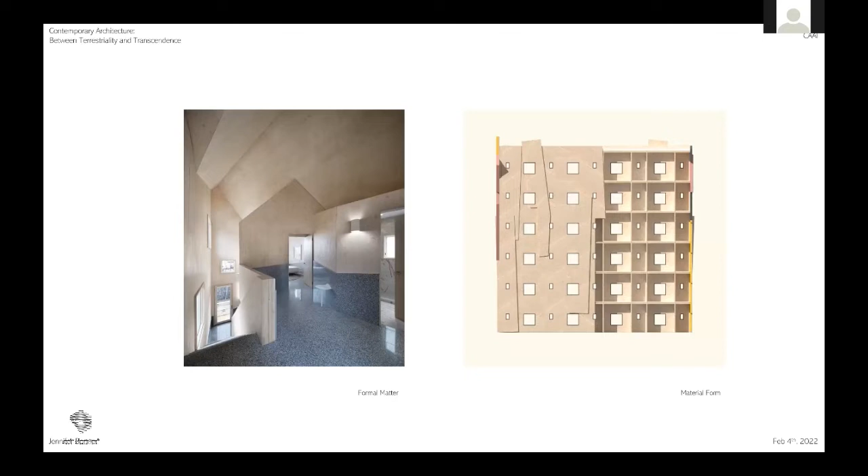Going back to our diagram of form and materiality, perhaps we could locate the project called House Gables on the top left corner, where she starts with an idealized composition of gable roofs, later made with CLT.

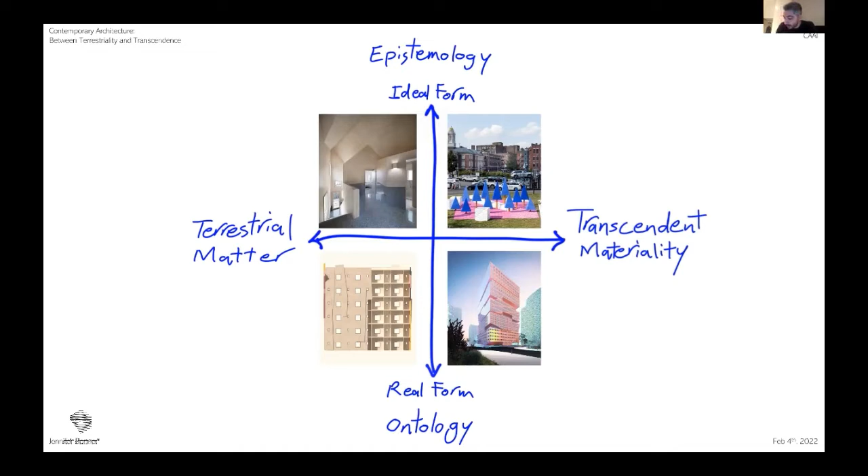So although we could see Jennifer's project touching all these areas, maybe we can observe a general inclination in her practice towards idealized form and transcendent materiality, which sometimes she calls an off-the-shelf approach in design. I stop here and invite you all to join me to welcome Jennifer.

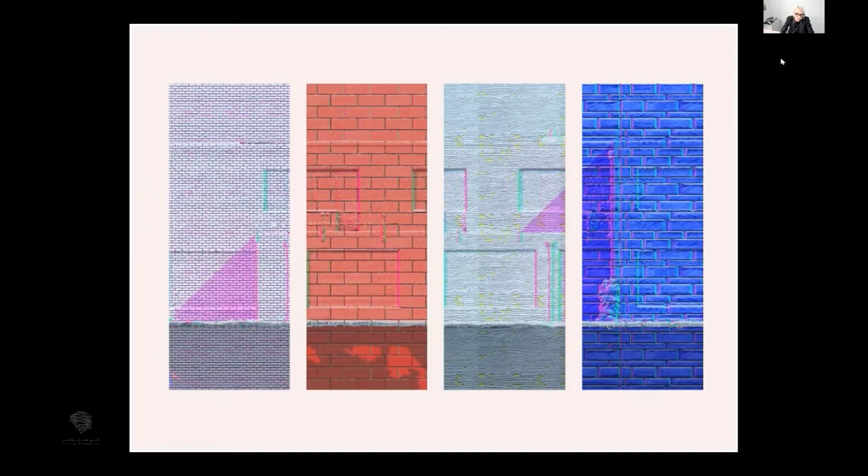And the result are these different kinds of elevational studies that are directly applied onto the mesh of House Longa and House Esther. And so we see that we're artificially... yes, please go on... just that there's a range of scales and misinterpretations and materials that we couldn't imagine would be possible embedded together in the same image.

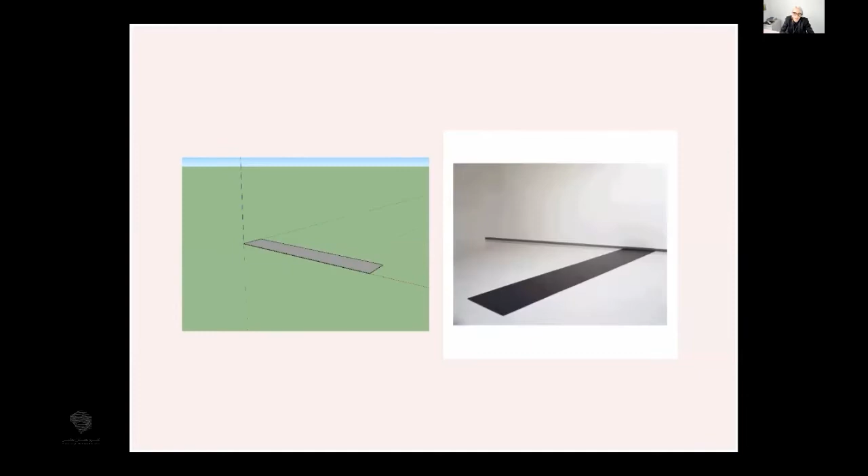These are the two sets of objects I'm working with. On the right, a catalog of minimalist art sculptures generally put in galleries, like Carl Andre and Peter Alexander. But we searched for these minimal art sculptures in SketchUp 3D Warehouse, which is the GIF on the left side. So we're kind of taking and borrowing these digital artworks.

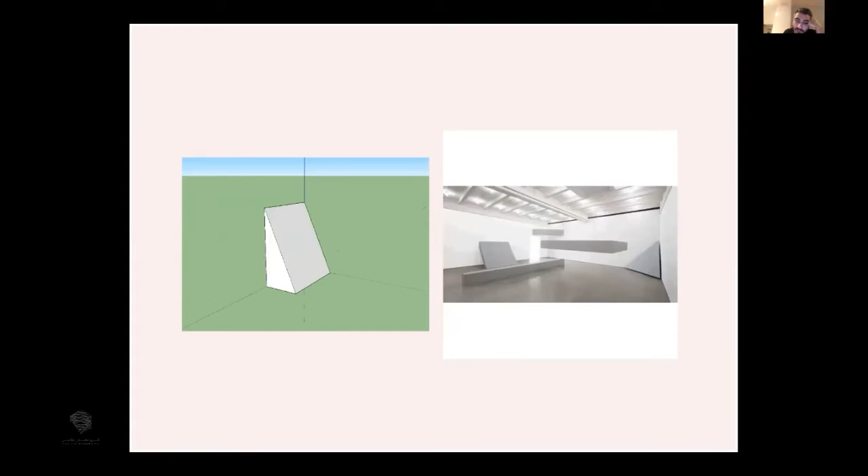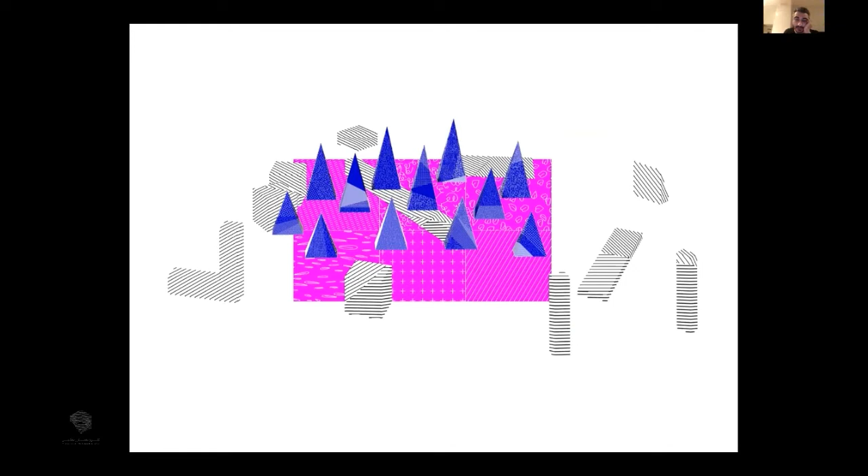Another thing that's important to the white minimalist sculptures is that I'm using vinyl siding, which is a very ordinary material in the New England area, but I'm misusing it by hanging it at angles that are traditionally not used. So this became a real process of unfolding, unrolling, and drawing through the various ways we wanted to apply the material to create this effect.

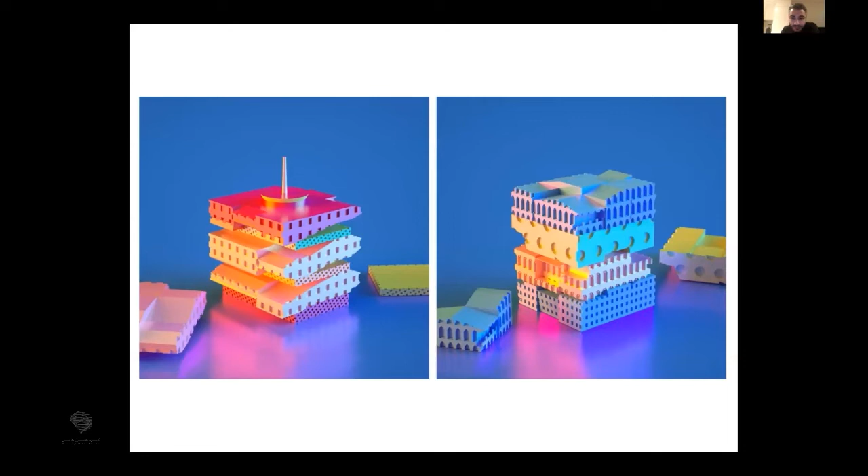So it's important to me that these conceptual models and digital models look eerily familiar, that they do look like a sub sandwich or a burger.

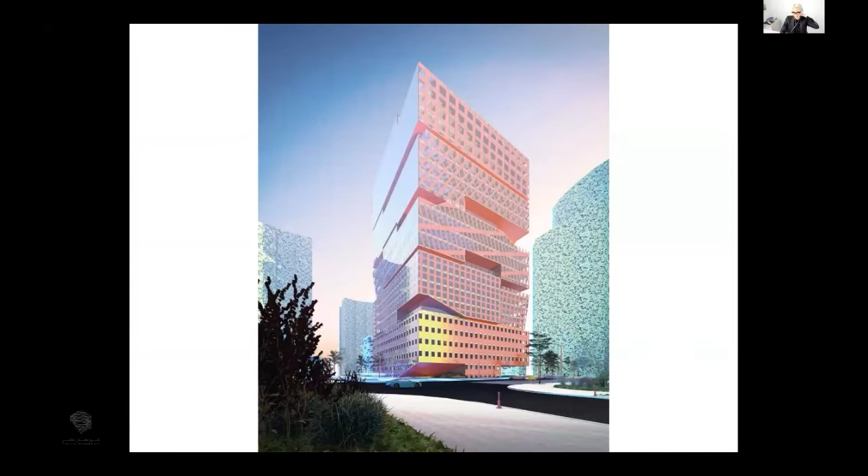But again, the ambition is not to stay in the abstract and inside the gallery, but to also turn the project into real architecture with real facades and plans, and a massing that could be a developer's pitch for a new mid-rise office tower.

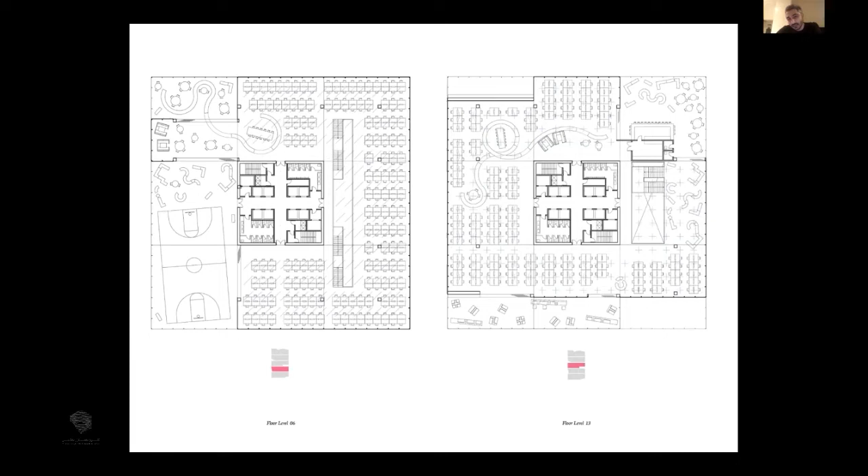And what this does is it affords this technique that we could have maybe open corners, or we could have terraces that are just adjoining the office plan.

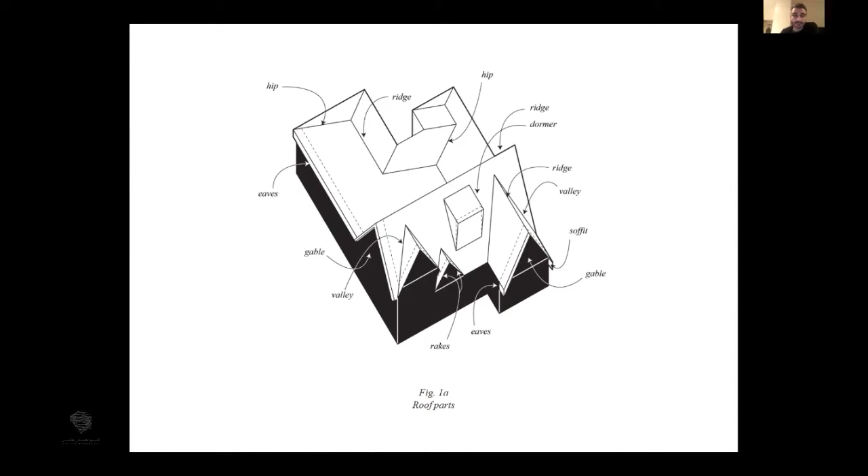In the American context, these ordinary houses are built with sticks of lumber, so 2x6s, 2x8s, 2x4s. And I would kind of say that this is potentially like, in the American context, could we call this the contemporary cathedral?

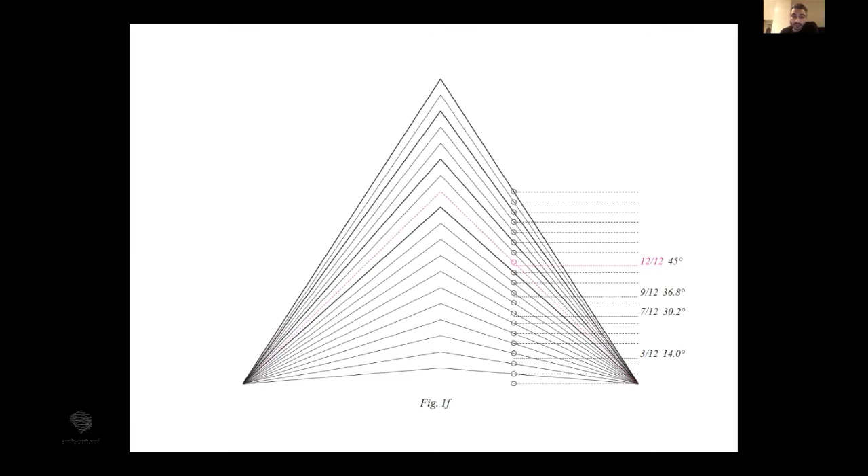Again, here's the catalog of these kind of ordinary forms.

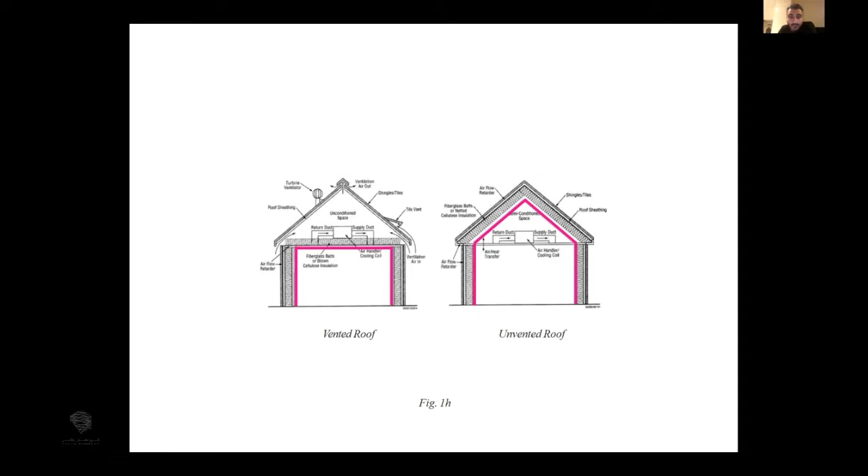So again, these are all the materials that I am wrestling with and thinking about as I develop the next body of work.

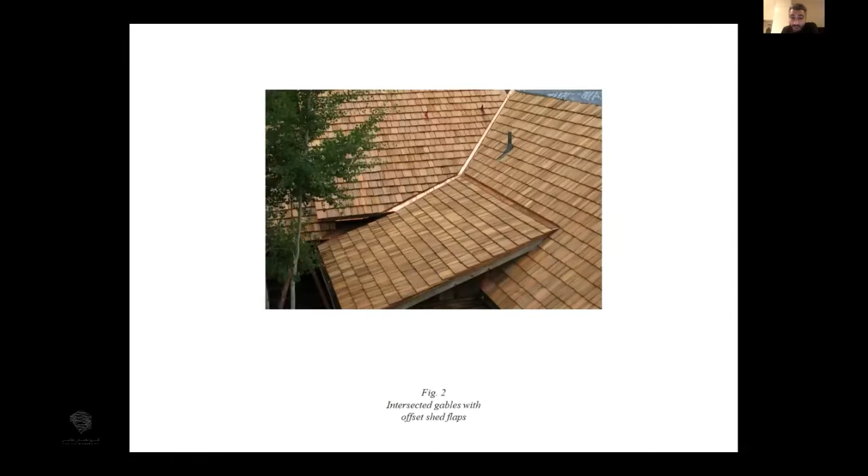So this obviously gets taken into the digital space. I wanted to point out the variety of roofs. In the more affluent neighborhoods, something like Buckhead, there might be 7 different roof types that cover the floor plan of these large villas. But if we look at the more humble neighborhoods in Cabbagetown, it might be just a shotgun house with a very simple gable or hip roof.

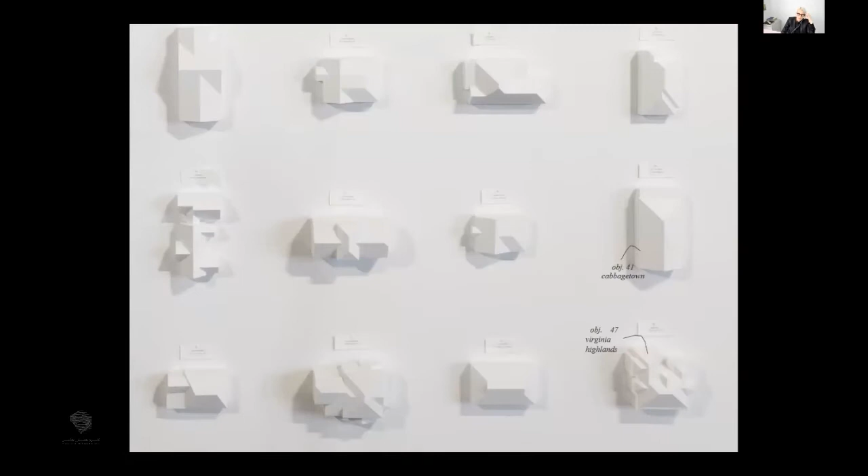And so this is the result of that design work. We made 16 large-scale massing models out of EPS white foam. Massing models are usually small studies that sit on our desks or in the conference room that we present to clients. In this case, I've taken the small massing model and scaled it up to this larger scale, but I have not brought any detail along with it. So in these 16 models, we're just purely looking at the geometry, the form, and the focus on the roofs.

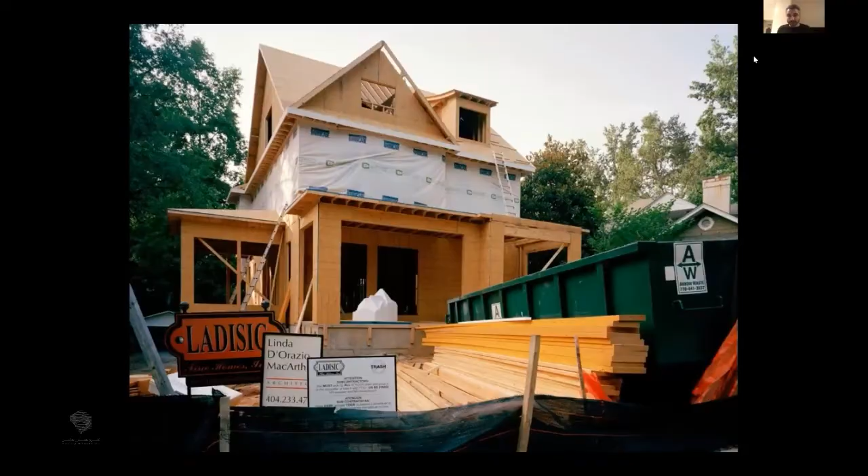So this one gets really exciting because we see the construction of the wood-framed house with the plywood, which in a way, if you squint your eyes, is a massing model itself, with the massing model sitting on the front porch.

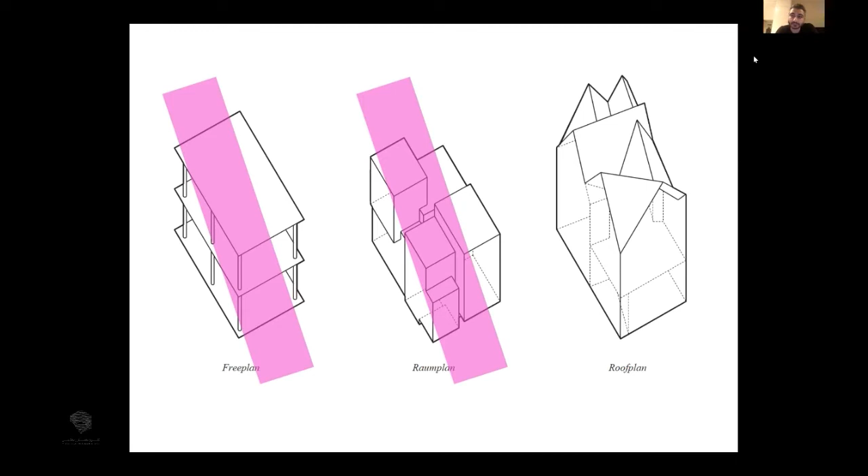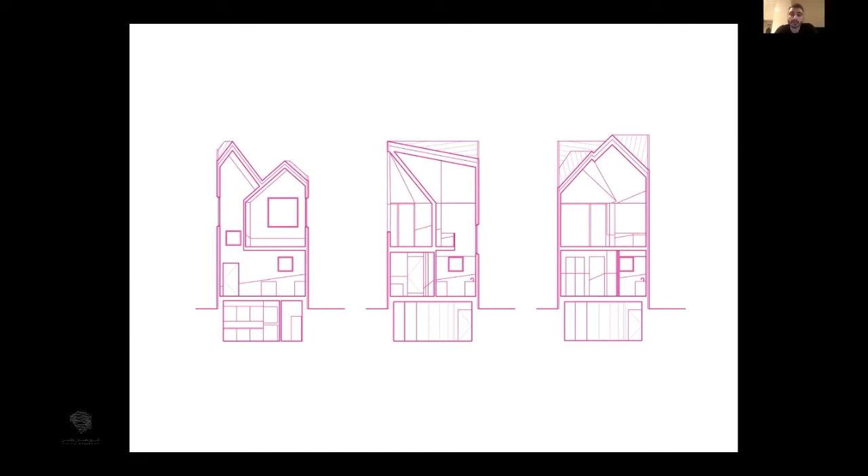Again, the dollhouse, and the introduction of another conceptual overlay, which has to do with what I call faux finishes. In the American South, there's a tradition of not being able to afford precious marble or materials, and a desire to upgrade one's home by doing it yourself, using an applique technique one might call faux finishing.

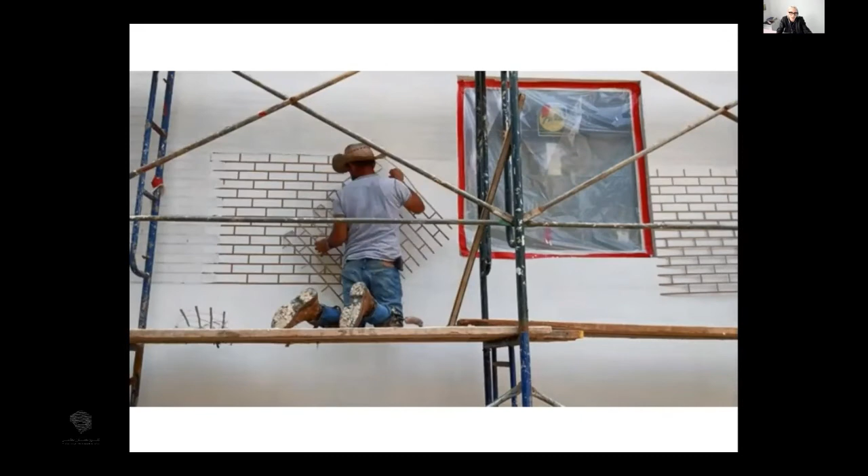So this is actually a product that's being applied in the field, which is a kind of brick template. It's a sticker. They apply it after they apply 2 coats of stucco. The sticker goes on, they trowel on the last 1/8 inch layer of stucco, and then they peel the sticker off. So it creates a very shallow relief. But what Arby's does not have that this Haus Gables has is the kind of glittery glow that is blown onto the building in the very final step.

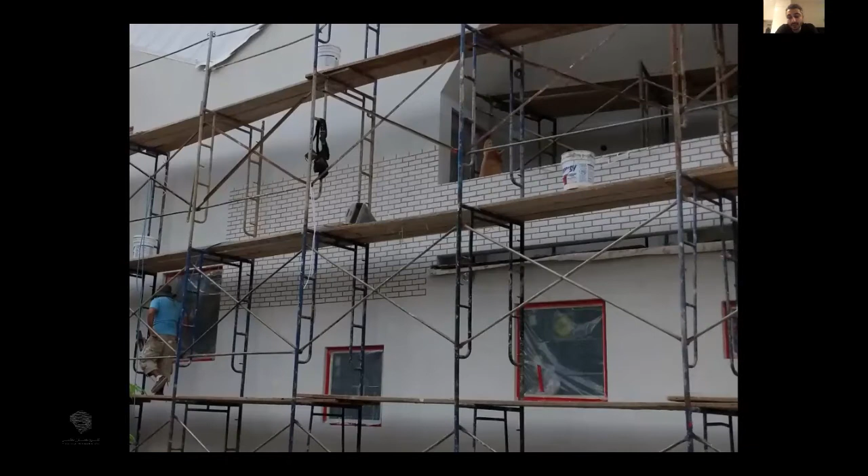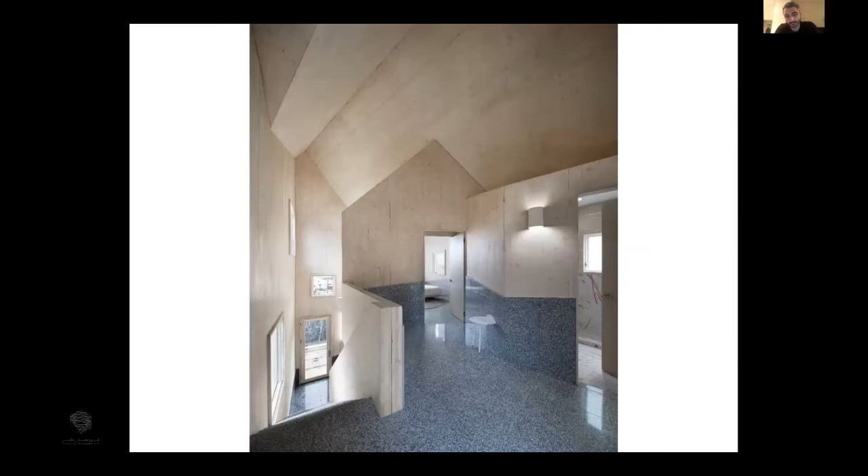So this is one of my favorite views of the house, on the 2nd level, looking at that roof room. Here we see the effects of both the kind of fake materials or faux finishes in combination with this highly engineered cross-laminated timber that's doing a lot of structural work. The cross-laminated timber panels become a superstructure, and the smaller bedroom can be hung from the underneath side. So the CLT is acting as a folded plate, and the faux finishes act as a wainscoting, a way of breaking up the CLT as the final surface.

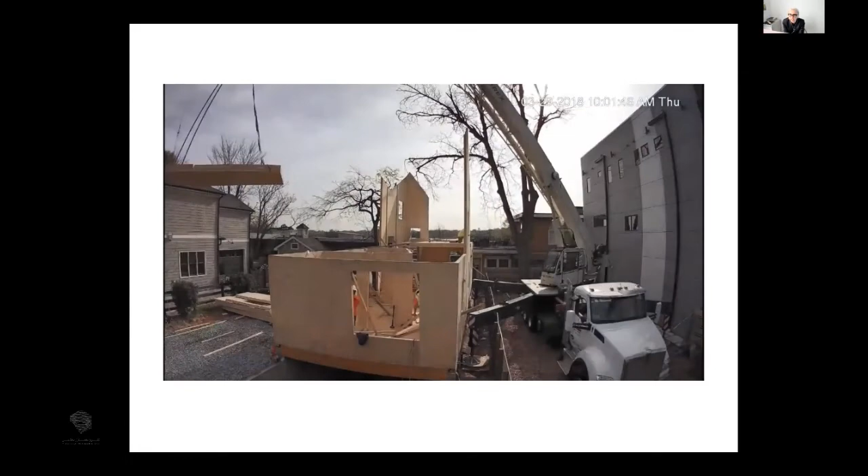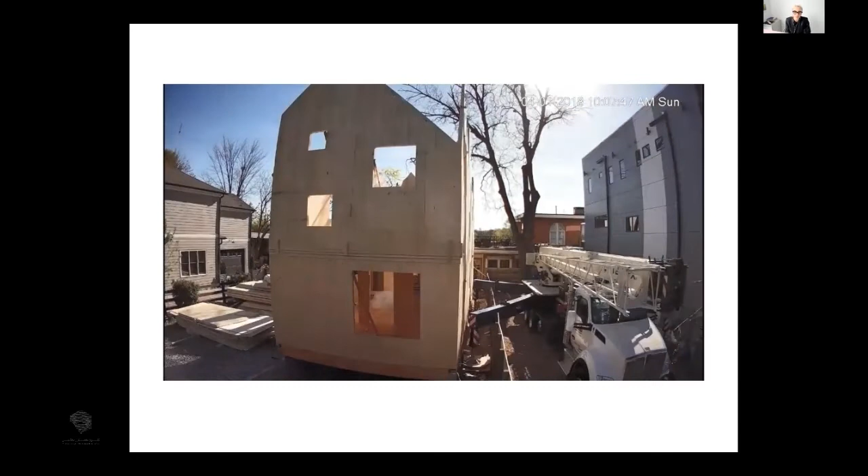Okay, sorry. Okay, so here is all the technical parts. This is the cross-laminated timber. So I'm working with Hanif Kara, a structural engineer in London, who, when we first started looking at how to crash 6 gables together, it became very apparent very quickly that we could not do this with the traditional stick frame construction. Hanif put forward using this kind of newish material, which has been used in Europe for the past 25 years, but is very new to the US industry. These are the cross-laminated timber panels. There are 87 of them. It took 14 days to erect.

Yeah, I could say so much, Aryan. Okay, yeah, I'm trying to summarize the numbers, to memorize them. So,

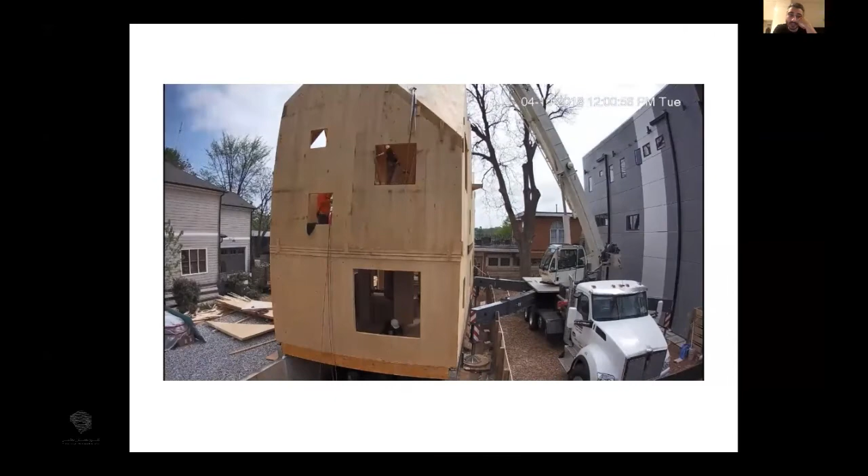So this is after the first day. I believe there's like 8 panels in place, and it kind of seems like maybe half the house is built after a day working with the 40-ton crane.

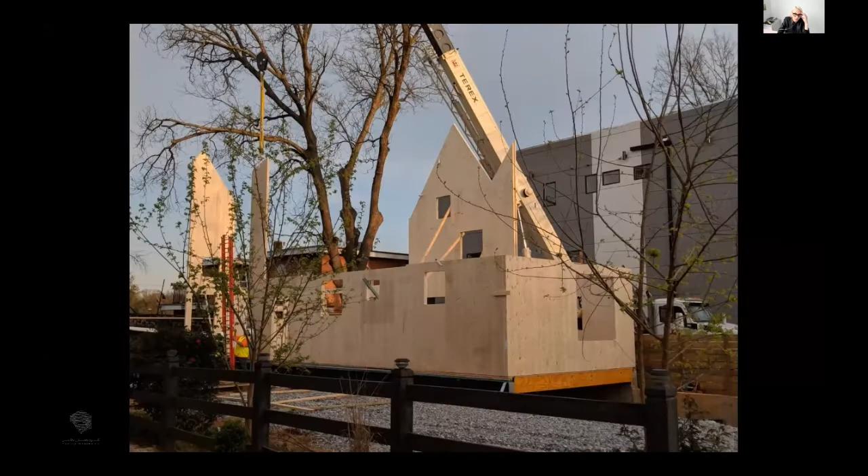Also to note here is that if you kind of squint your eyes, what's super interesting about this materiality is that it resembles model making material like foam core or cardboard that would be found on our desk. So the way that we build architectural models with this material is also the way in which we construct it one-to-one.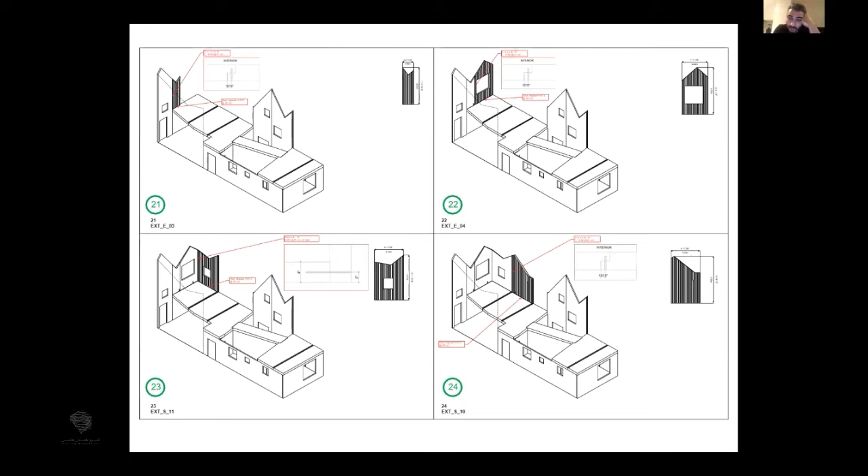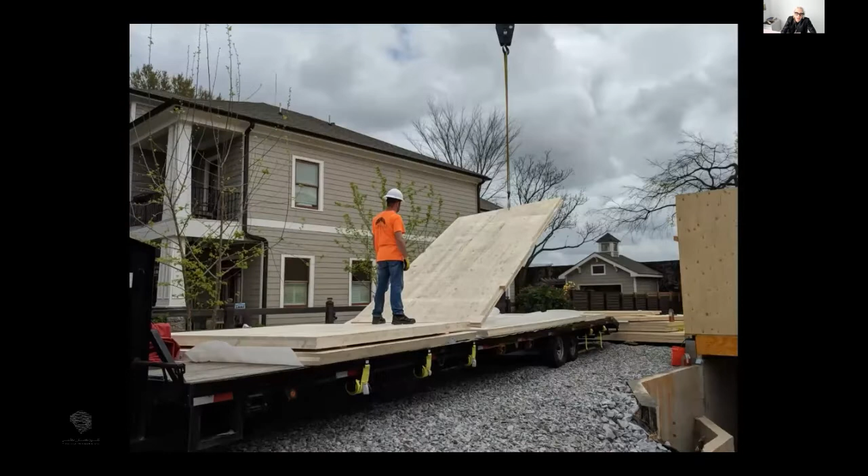So the panels were produced in a factory in Austria by KLH, and Hanif sent engineers from London over to the factory to inspect the product before it was placed into these shipping containers, and then ultimately arriving on site at the port of Savannah and then trucked over on 11 trucks to the Atlanta location.

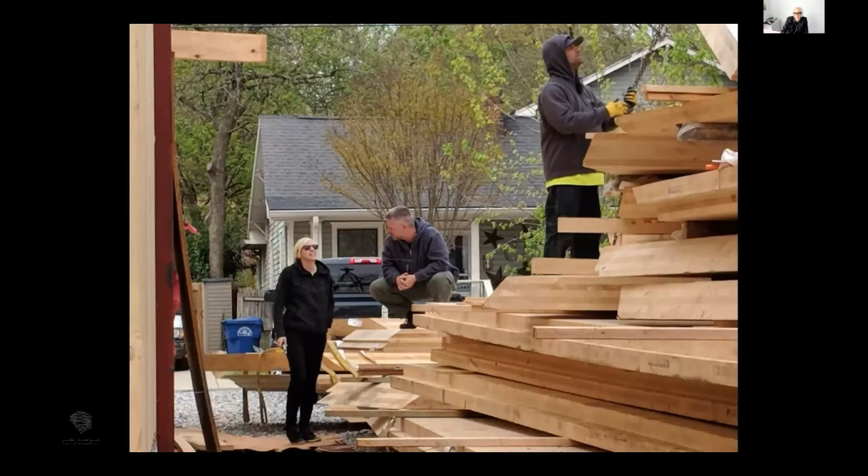So again, 87 panels, they were all flip milled, meaning that we're cutting a geometry on one side of the surface, we're flipping the panel and cutting in another geometry. And that's because of the kind of compound cuts and angles in order to make the ultimate geometry.

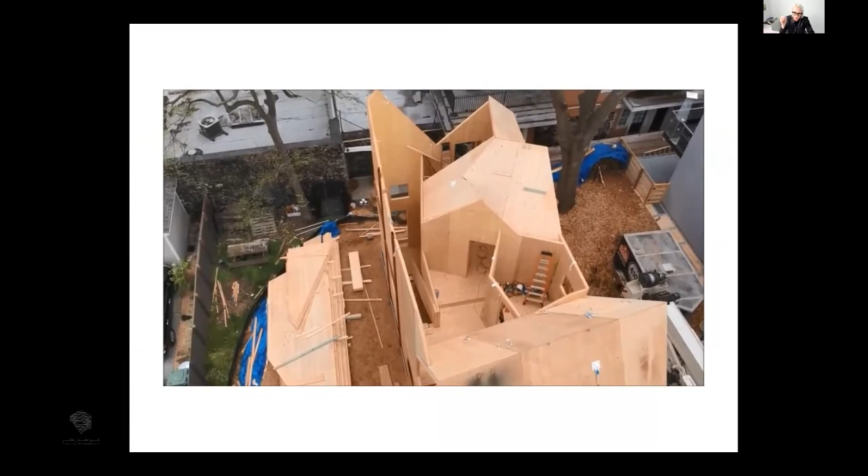The exterior walls are made of 3-ply, so 3 layers of the timber laminated and glued together. The roof panels are 5-ply, so 5 layers, and the floor panels are 7-ply.

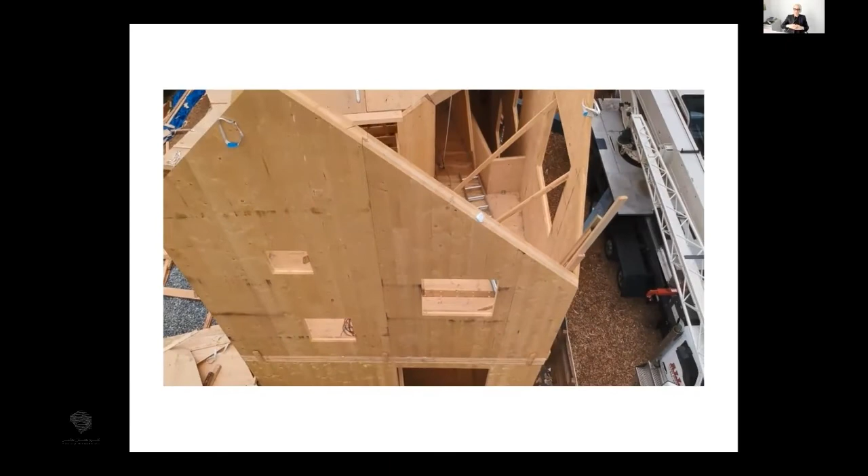Yeah, so there were 4 engineers that ended up working on this project. This was at the time the like 3rd or 4th house within the US constructed with this material and with this technique.

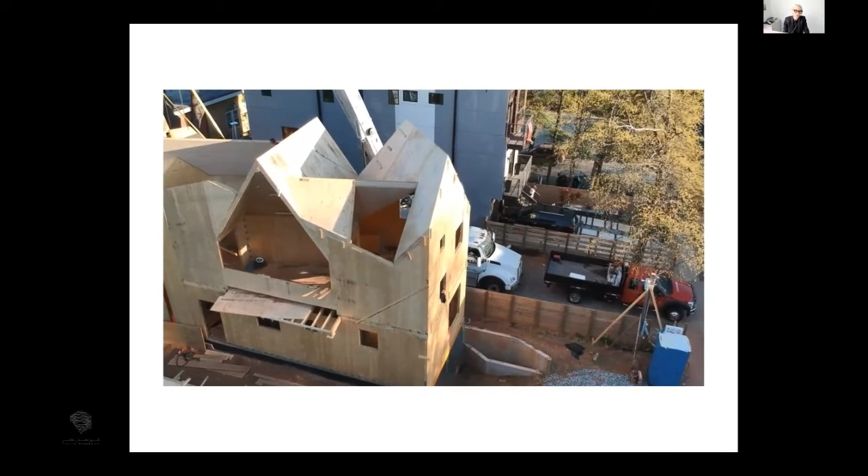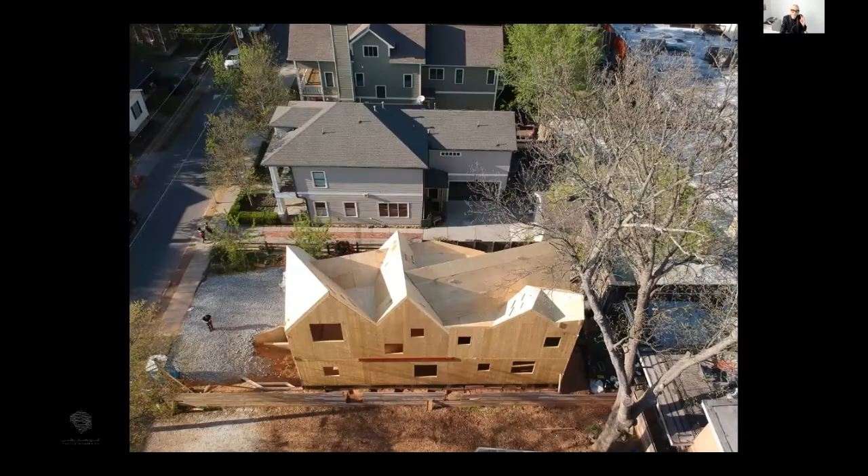So this was a very exciting day for my office, as this was the first project I'd ever built. And so to go from like the white foam model in the gallery to kind of building the one-to-one massing model on site was like a, you know, pretty exciting moment.

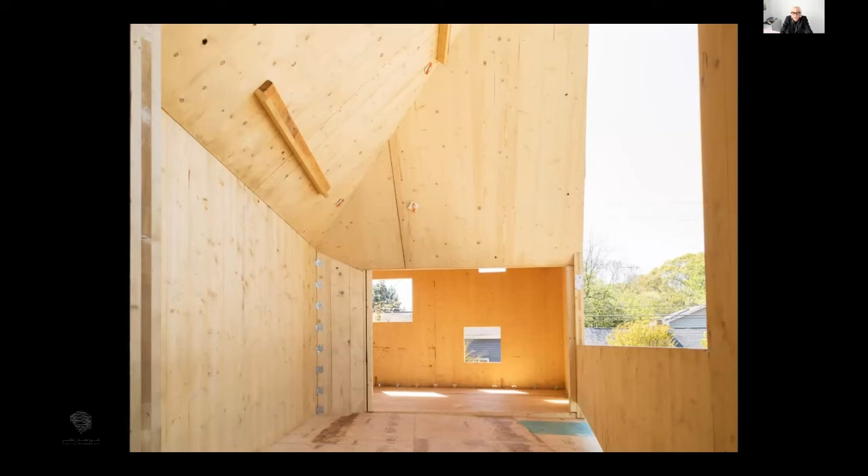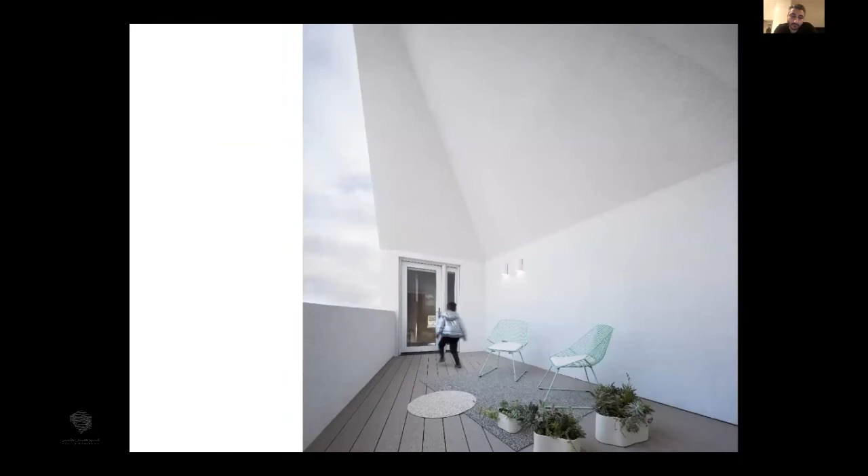So there's obviously the exterior of the house is white, trying to be kind of the original massing model. There's two sets of spaces that are also kind of very white, which is this kind of patio terrace on the upper level. And then also the garage that's kind of at the base of the house is finished in this kind of white, reflective, glossy materiality. So it's trying really hard not to be a garage and more like a gallery.

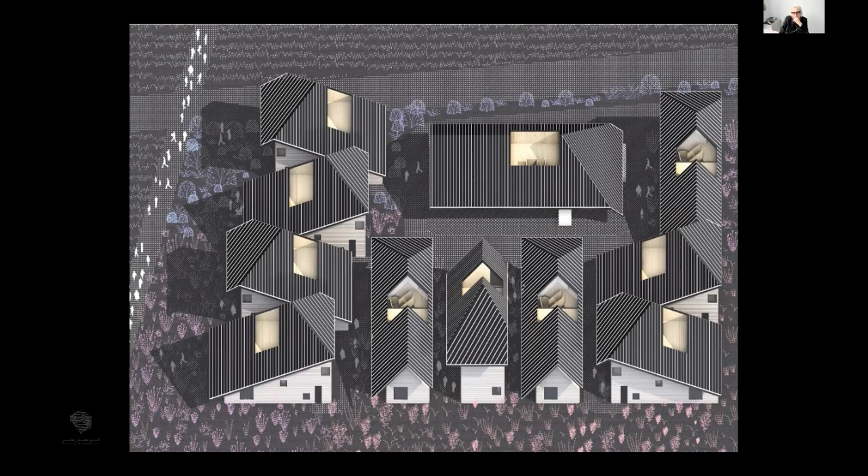And here the materiality is trying to be quite cartoonish. So this is a standard metal roof system, but instead of using kind of small battens, I've selected a really wide batten. So I'm trying to make the roof look like a drawing or a cartoon, and the same ideas applied to maybe how the landscape would be imagined or how the cladding system would be imagined for the exterior.

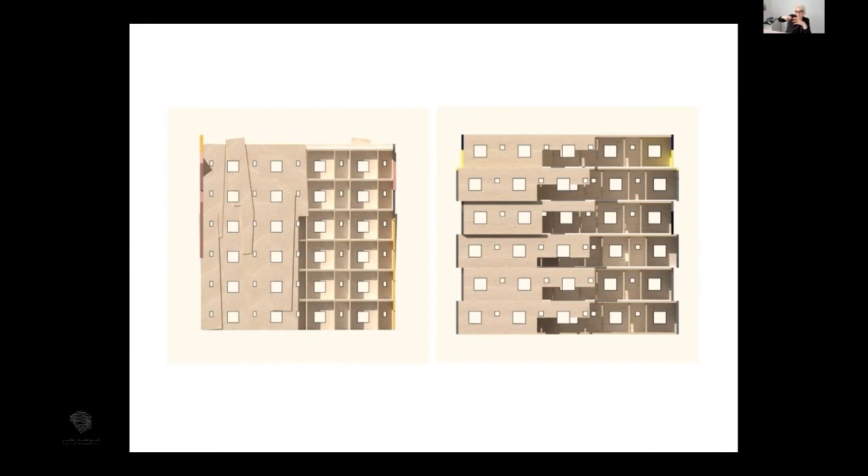So if you have a 50-foot block and we put 4 together, we then have a 200-foot block, housing block, which is an interesting scale.

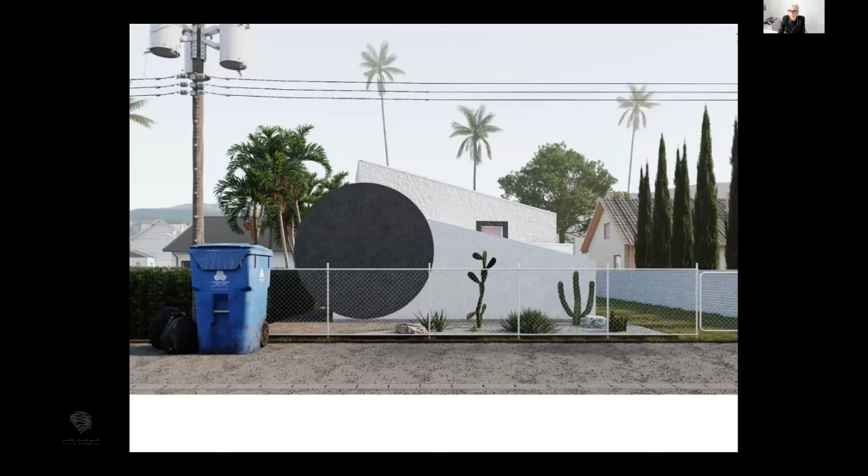And so these are a set of models and also their materiality, which is taken directly from the context of Los Angeles. Most houses in LA are made of traditional framing with a stucco finish. We're interested here in all the textures we can create with stucco, while also reading a very particular point in architectural history, which is where the typical Los Angeles bungalow in the 1970s started to change its look and form.

People were hiring interior designers to dress up the facades of these original bungalows. Someone like Charles Jencks, the theorist, came through and looked at this phenomenon in the 70s and termed this technique a false front.

Sorry, Arjen. No, it's good.

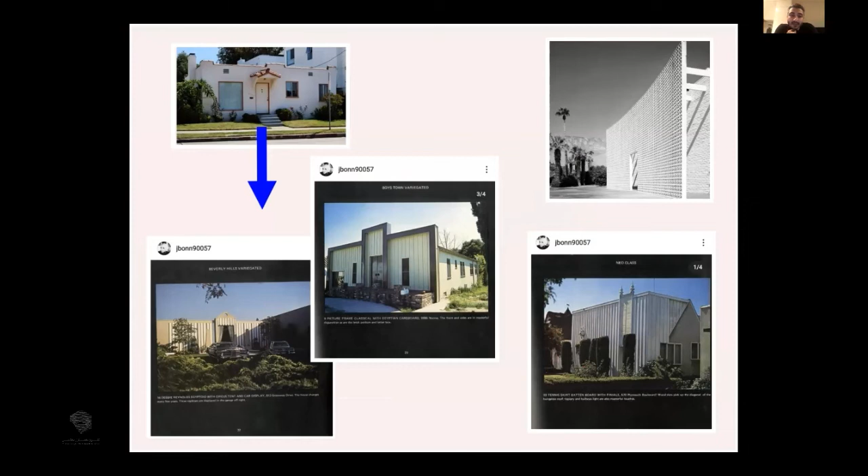Again, interested in art practice and the work of John Baldessari, where he's using a reduction of very primitive shapes and figures on top of

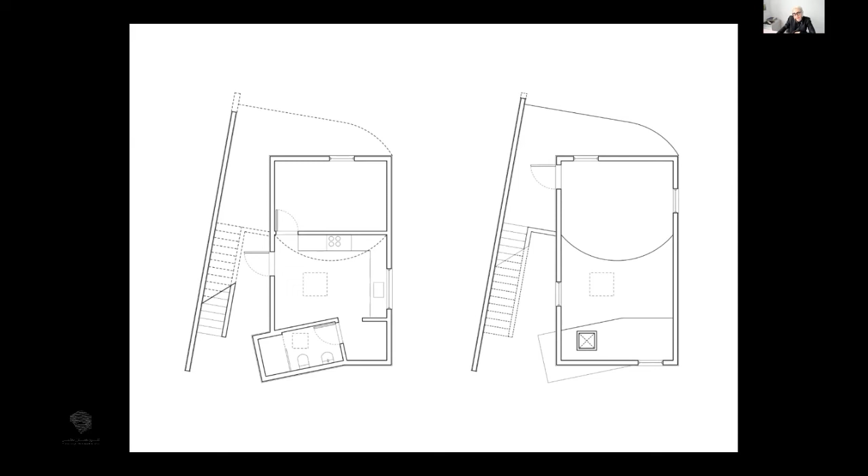And this one, this is a one bedroom with a mezzanine.

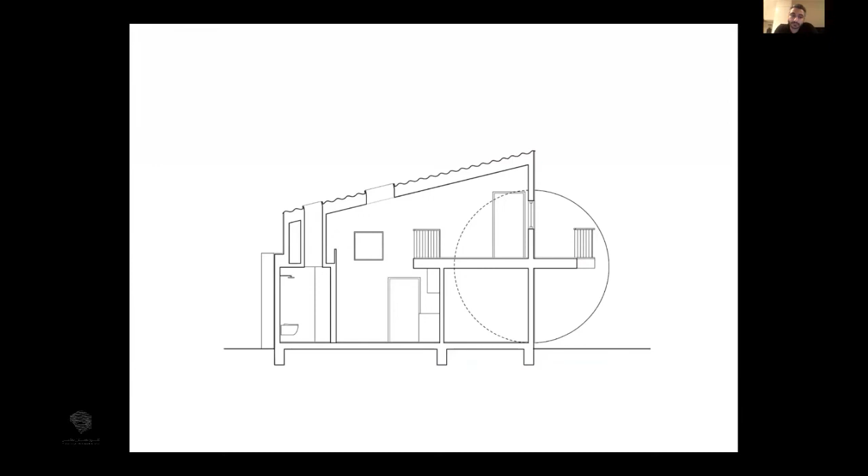So, yeah, we're definitely using materials as large scale graphics that get applied and then start to both inform the form or the shape of the roof, and also the technique for making these false fronts.

And I think this is interesting also functionally, because if you have a tenant in your backyard in Los Angeles, this kind of blankness might be super useful to create a sense of privacy between the tenant and

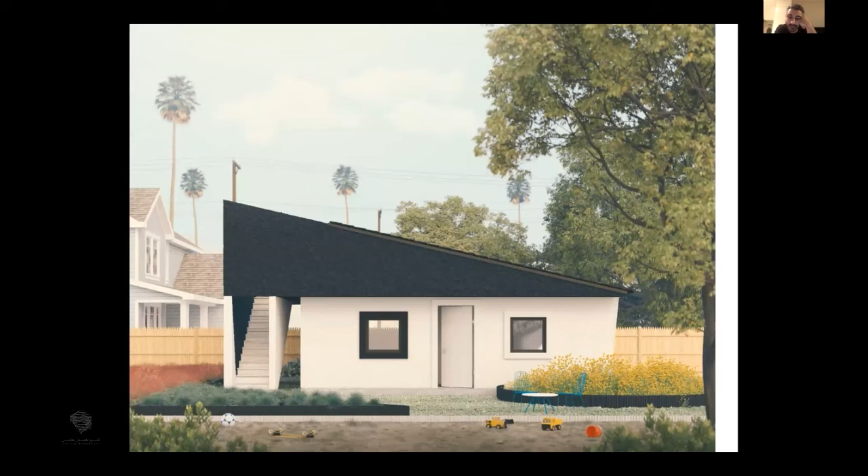So what's interesting, this one's called Lean-to ADU, which also takes a lot of reference from the American do-it-yourself, build a shed in your backyard.

But what's interesting about this section is that the roof, the terrace inserts itself inside the form to set up the kitchen space, but also claims more territory within the roof space for the exterior.

So just to mention that these ADUs are so small, can you even do architecture with them? I mean, they're so tiny, very difficult, you're maxed into a lot of building code and height limitations, and the square footage is small. So my effort here is to try to spin it into architecture in some way.

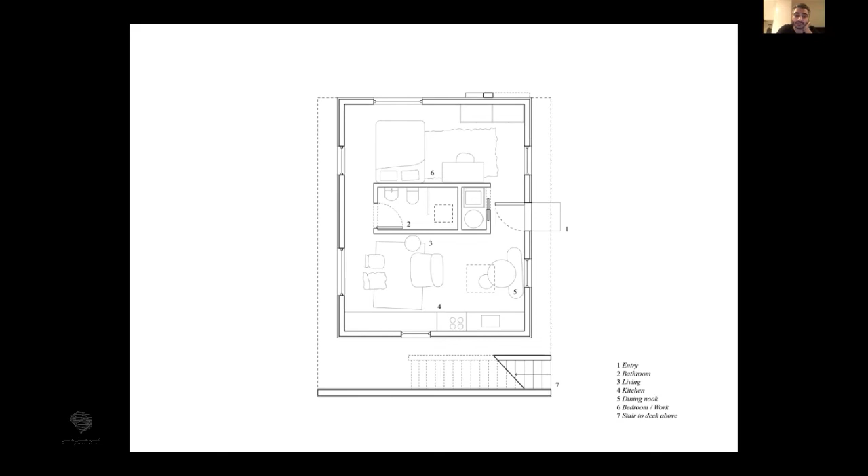And some of this is the view from the terrace, the interior.

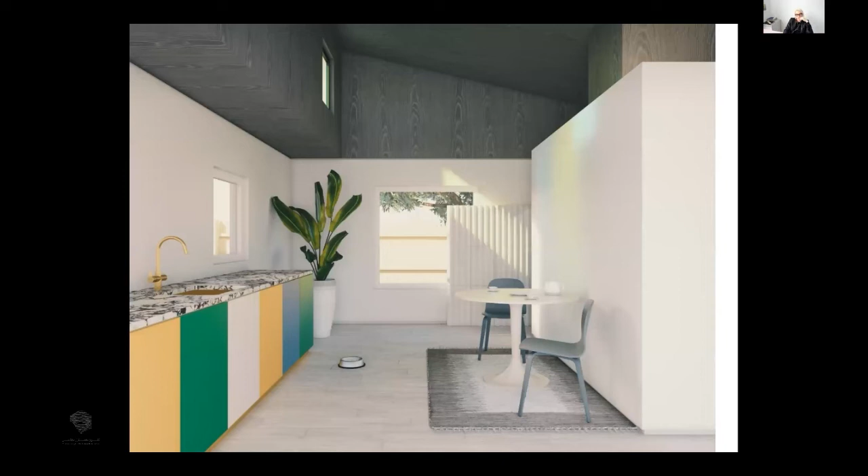And what's interesting to me is always this kind of alley view of the small or the ADU house sitting in the backyard of the kind of larger house. And that's the kind of end of everything.

I don't have a big summary to give, but I think if we could talk through a few questions, there might be a way to kind of summarize some of the work. I did want to say that I hope that after describing my design process in each of these very, very different projects, there's a kind of theme emerging: that the work always starts with a conceptual question or research question or a set of ordinaries that I'm trying to push against. And then the kind of forms and materials and color and all of that looks very different project to project. And that's always on purpose and intentional, to make sure that my architecture is kind of always changing and challenging even itself.

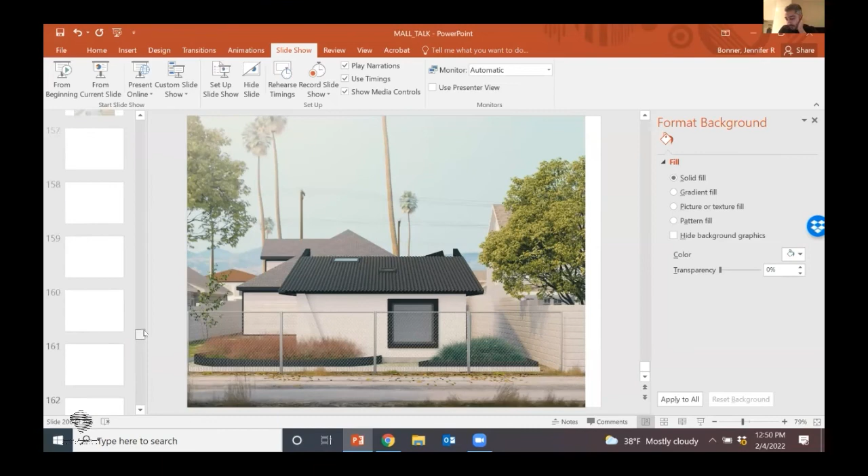Okay, so there are a lot of topics that we can discuss and talk about. But what is very fascinating for me is that if we see materiality as a spectrum that has both ends, using natural or realist material on one side, and on the other side fully artificial, dematerialized entity, almost representation. To me, what's super interesting is that in a way you try to stand in the middle by looking at both. In a way you take the real material and try to hack it using very non-material digital media and transform it.

I think the reason I'm in the middle, Arjen, is because I think we just lived through maybe the 2000s where we were building very fluid forms, and there was a real hype around that technology of building facades and geometry, almost as liquid. And I think it only resonates so much, right? So I think it's important that we are looking at the real, but then we're also, as you said, trying to push it into representation and the artificial in order to progress that original material. And also, being in the middle, I have to get things built, right? So I do need to rely on products and traditions that are kind of known, and then I need to, as you said, hack it, to then pull it into this contemporary frame of mind.

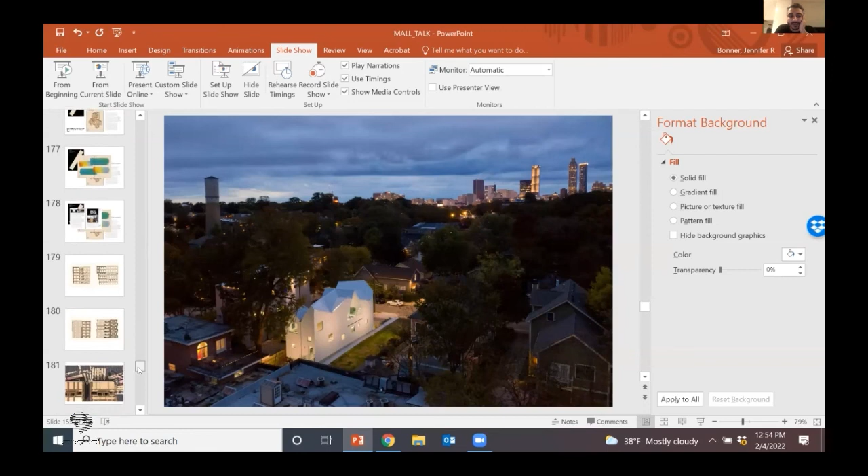Okay, before I open it to the audience, I want to ask you one more question. I think considering your activity on Instagram, and this lecture is being shown on Instagram Live right now, I'm curious to know, what do you think about the influence of Instagram on architecture today? Is it too much? Is it overwhelming architects? Is it too much sensory input that we receive every day? Should we filter it, or is it helpful to get influenced by different stuff? What do you think about this?

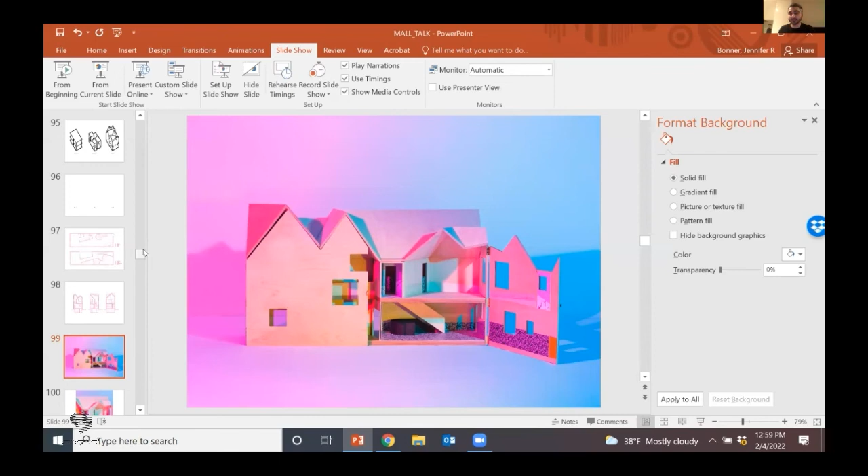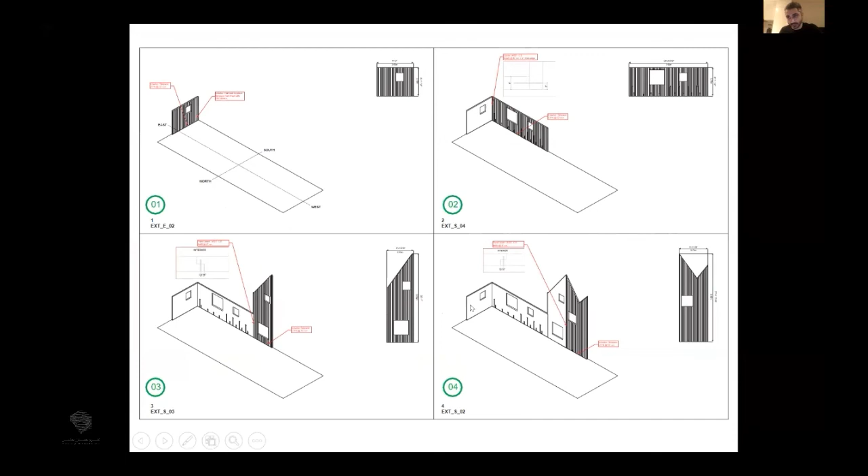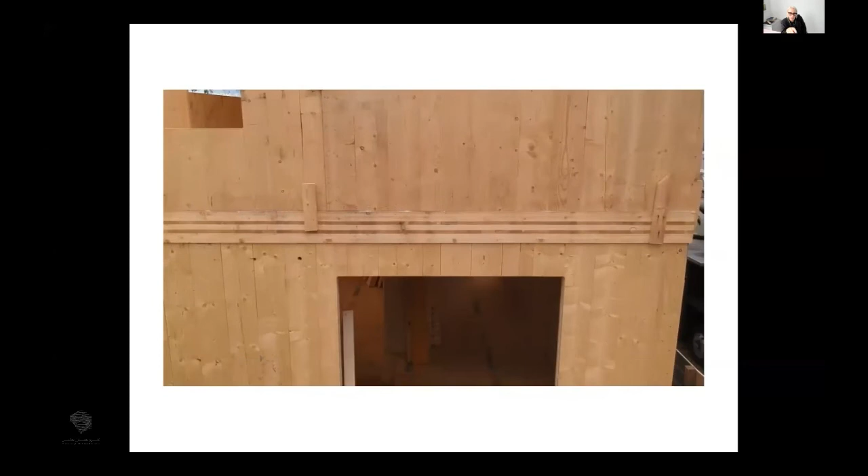Yeah, great question. I got carried away talking about materials and CLT and modules. But yeah, it's really important to think about the mechanical systems for building a house like this, because you can't hide cables or water pipes or HVAC systems. So what we're doing is we're running all the electrical... see that? It's too fast. Hold on. Let me back up.

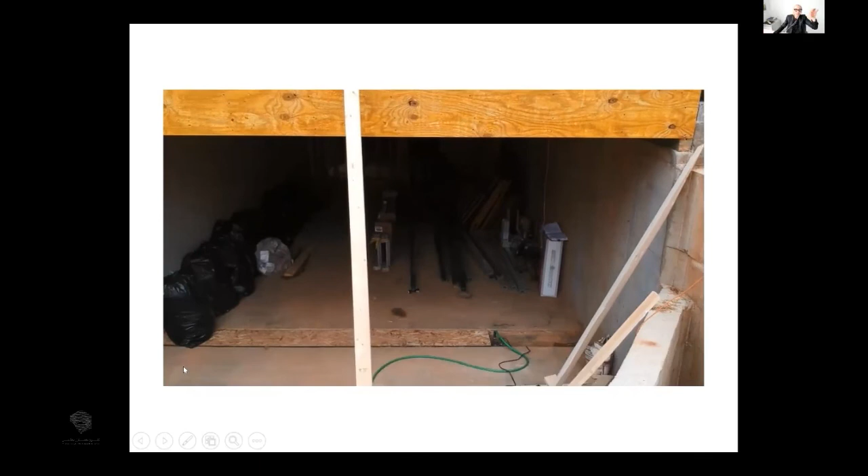Okay, so if I go here, I'm going to pause it. So the entire CLT box is sitting on top of a concrete basement block. So let's say this wooden house is sitting on top of a basement. And this layer right here is traditionally framed. So we're using a joist running across. We can run all our electricals and pipes and mechanicals through this floor plate. And then I'll explain more, Arjen.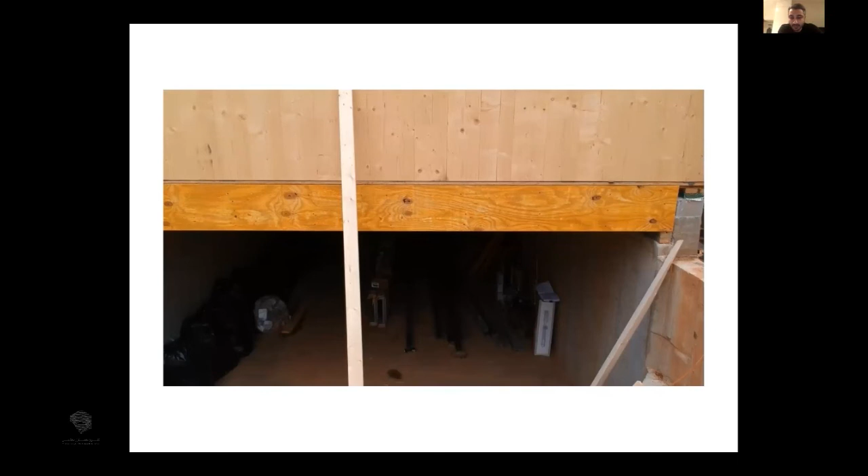Okay, so the electrical is popping up into the cavity of the wall, which has been routed out. And that's why we're putting the faux finishes over the top, to hide those wires to the electrical. The HVAC system is ductwork also in this plenum, and it's being pushed up through this floor plate into level 1. Then we have two mounted ductless mini splits at the top of the house, and they're pushing heat and cool air down. And so there's two different systems working together.

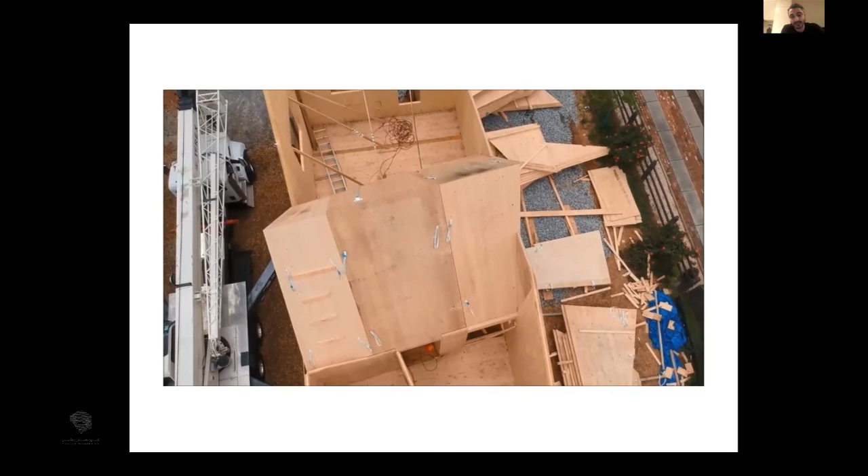And then on the second level, we've got our CLT floor plates. Then we put sleepers, so we put 2x4s on their side and we lay them up. And in between those gaps, we run electrical and then we put the finished floor on top.

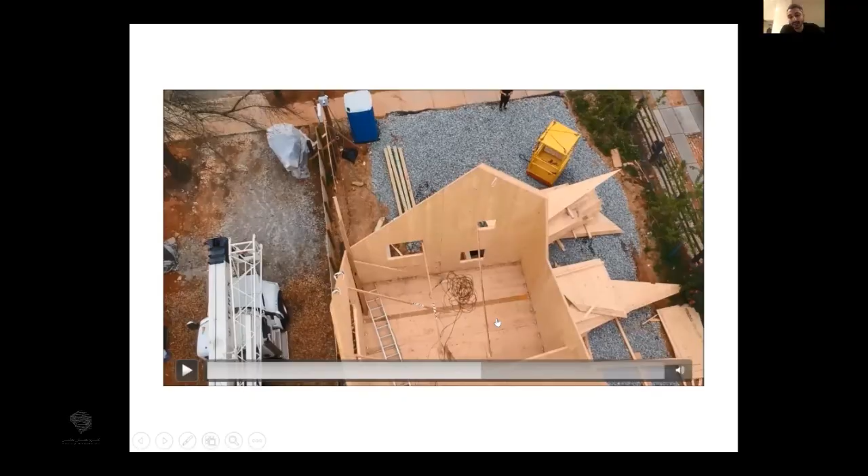Yeah, good question. Great, thank you so much. Super helpful. I'm trying to go through the questions to see what else is asked.

There's a question about the city codes. Did you have to deal with difficult codes, or were there challenges?

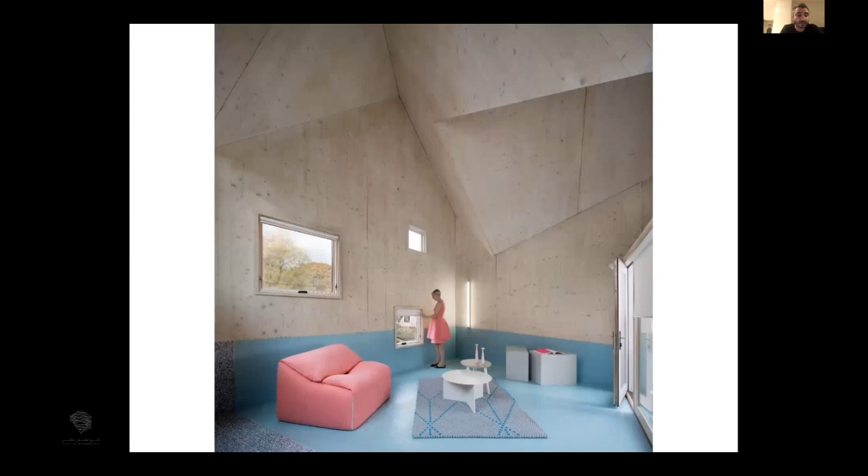So they're asking about the fact that a lot of the ordinary materials you mentioned are about the exterior, about the shell of the building, about the facade, or about the roof. And then how do you usually control the interiors in the spaces? Are those also ordinary to you, or what's your take on that?

Yeah, good question. The interior is very foreign to me, and it's not ordinary because we don't build houses with wood in the US. So this feels very Nordic or Northern European, or like some kind of cabin in Sweden or something. And so we're used to very white drywall, gypsum board interiors. And so this wood is like crazy, exotic, strange.

And the only thing I would say about the faux finishes is that they are ordinary. They're from a catalog, they're products. Like this floor is used in hospitals, because it's a vinyl that can be cleaned easily. And I just picked a cool color, right? Whereas hospitals usually pick a brown or like a tan or something. So in a way, it is ordinary because I didn't invent these materials. They're products that one could buy.

But the weirdness, I think, has to do with the wood being a surface that we would live in, and also the combination of the two. So if I were to leave the wood untouched and put in a wood floor, this would not be a house in Atlanta or in the American South. It would be a house somewhere in Europe, I think. And so my insistence on this other material from the bottom third of the floor up, running up the walls, is somehow pointing to the American South, the tradition of faux finishes, faking it because you don't have money, these kind of themes that I identify with.